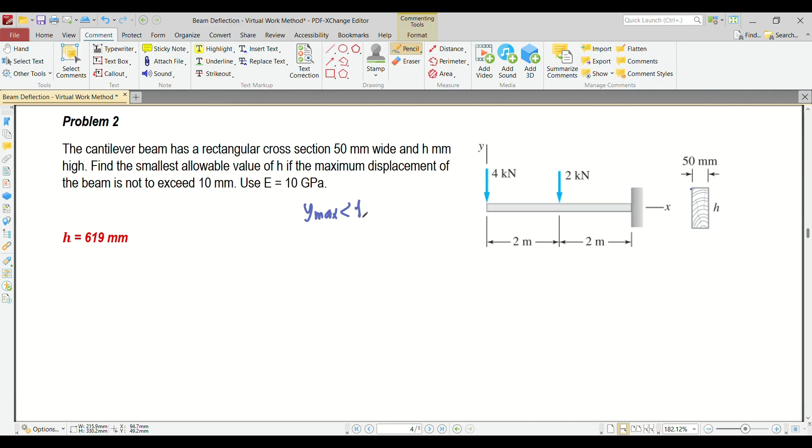So in this problem, meron ka lang na limitation na dapat daw yung Ymax mo should be less than 10 millimeters, tapos hinahanap yung value ng h. So now, how do we solve this problem? Just like what we did on our previous example, you need to cut the real beam and then get the moment equation. So cut natin to. Since may dalawang segment kasi naputol yung loading, so dalawang moment equation din.

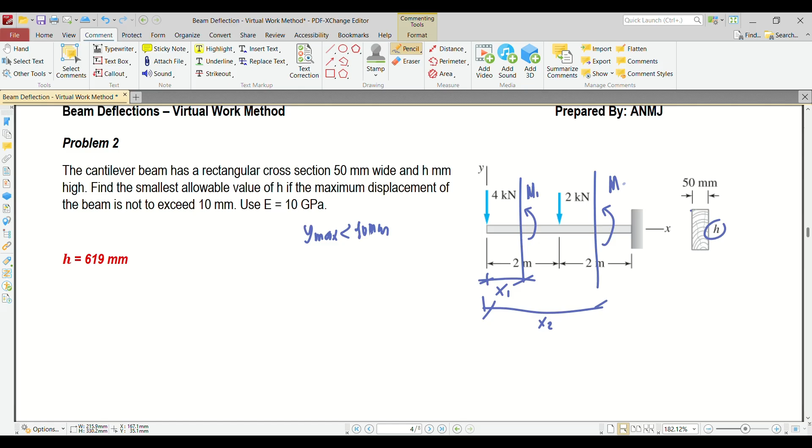So this is x sub 1, this is big M1. Big M1 or big M in general is used if you are creating moment equation for the real beam. So now, let's create moment equation. So yung M1 natin class is just equivalent to negative 4 x sub 1. Negative siya because it has the same direction for the moment.

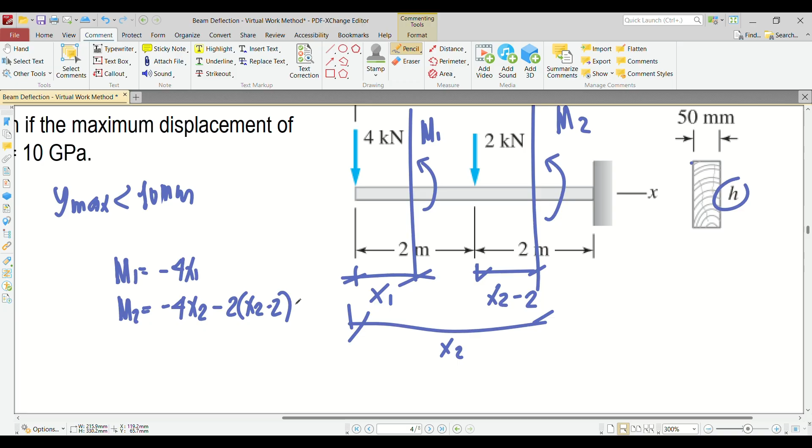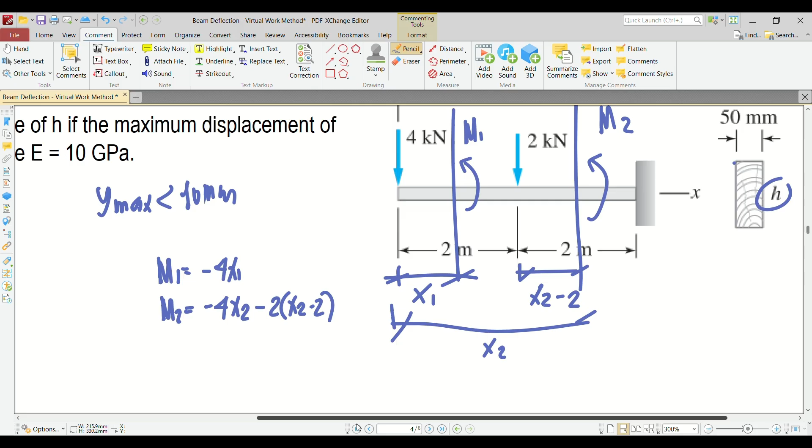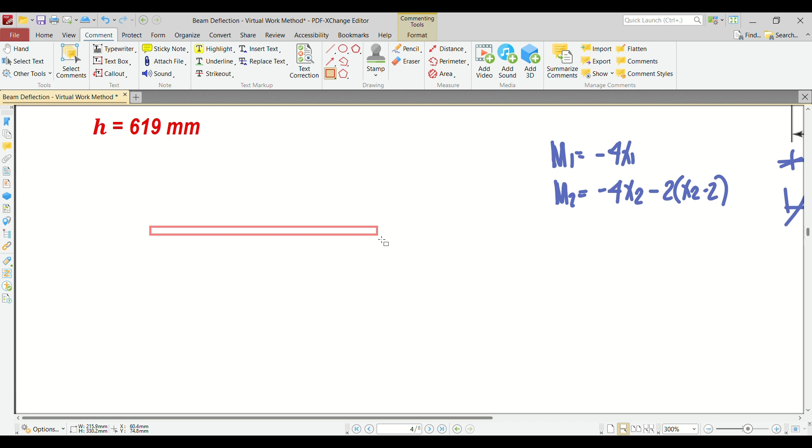So ang pinapahanap maximum deflection, so kailangan natin mag-create ng virtual beam. Again, yung support condition hindi nagbabago. You just need to incorporate 1 unit virtual loading. So this is our beam. 2 meters pa din ito, and then this one is 2 meters. You need to incorporate 1 unit loading downward. Siyempre downward naman talaga yung deflection dyan. Kung paano mo kinat yung real beam, ganun din yung virtual beam. So this is small m1. This is small m2.

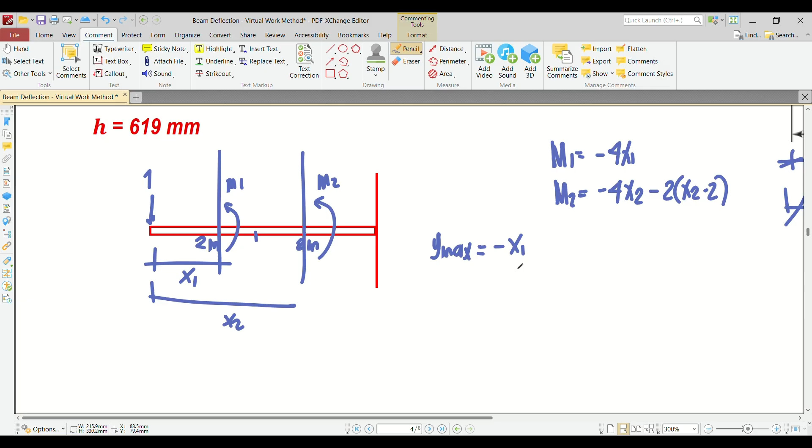So now, hanapin natin yung Ymax. Moment equation muna. So m1 is equivalent to negative x sub 1, and then m2, negative x sub 2. And then let's plug that in our formula. So our formula is 1 multiplied by Ymax is equivalent to 1 over EI multiplied by the integral of negative x sub 1 multiplied by negative 4 x sub 1 dx1 from 0 to 2.

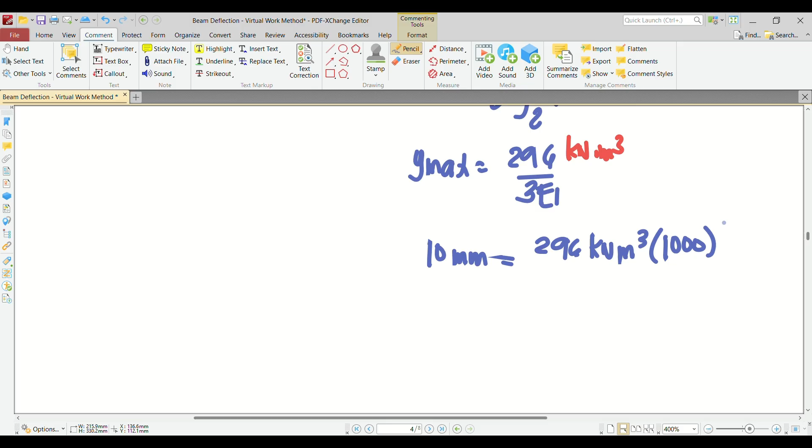Yung E natin is 10 GPa. So pag kinonvert mo yan, that's 10,000 MPa. So 10,000 Newton. Cancel ko na to ha, para hindi tayo malito. Newton over millimeter squared multiplied by B. Ano ba yung B natin? So yung B natin class is 50.

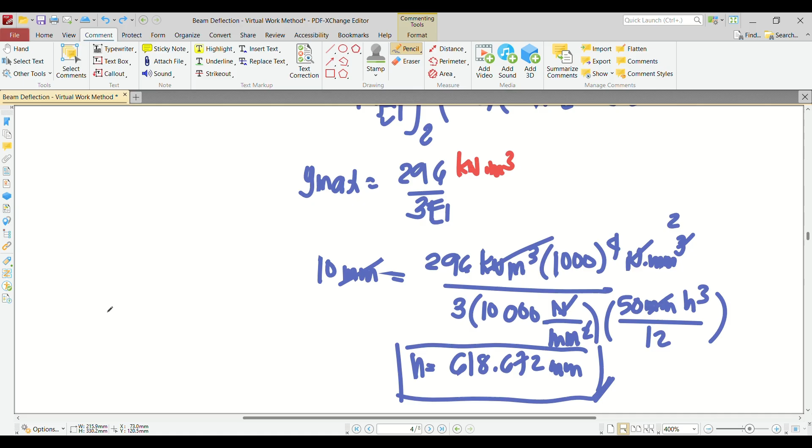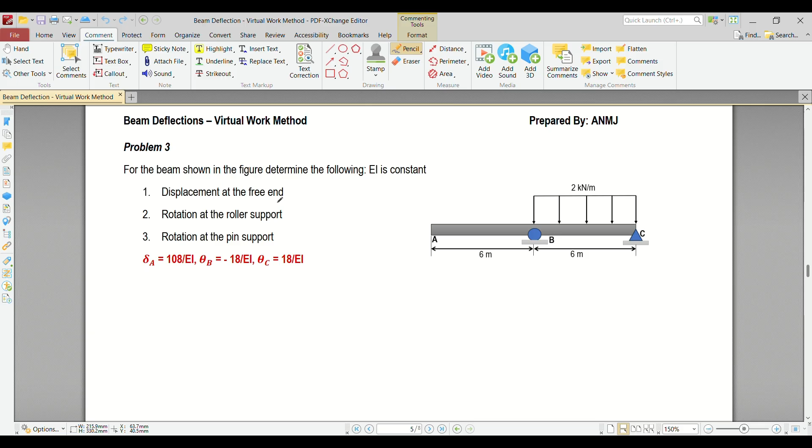So, the right answer here is 618.672 or 619. Okay? So, that's how we answer problem number 2. Okay, so let's start to answer problem number 3. So sabi dito class, for the beam shown in the figure, determine the following. EI is constant. So pinapahanap sa atin, displacement at the free end, rotation at the roller support, and then rotation

at the pin support. So ngayon class, madali lang naman solvein yung reaction nito. So para lang siyang simply supported beam and then subjected to loading. Although it does have a free end, wala namang kasing loading doon. So we don't need to use that segment in determining the value of the reaction. So parang WL over 2 lang ito. Parang uniform load na simply supported.

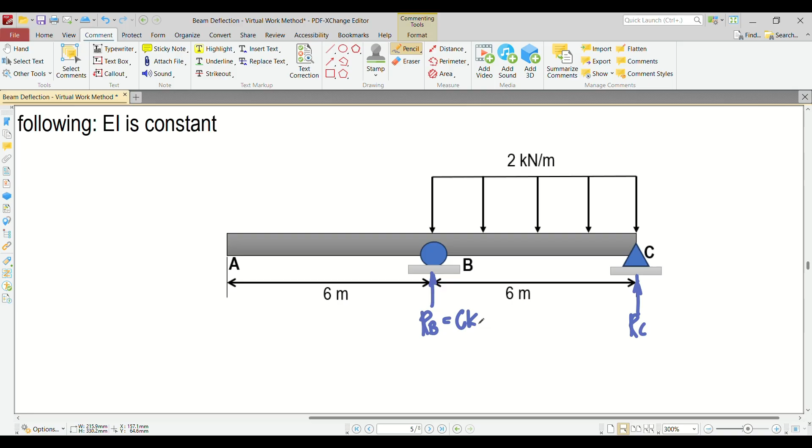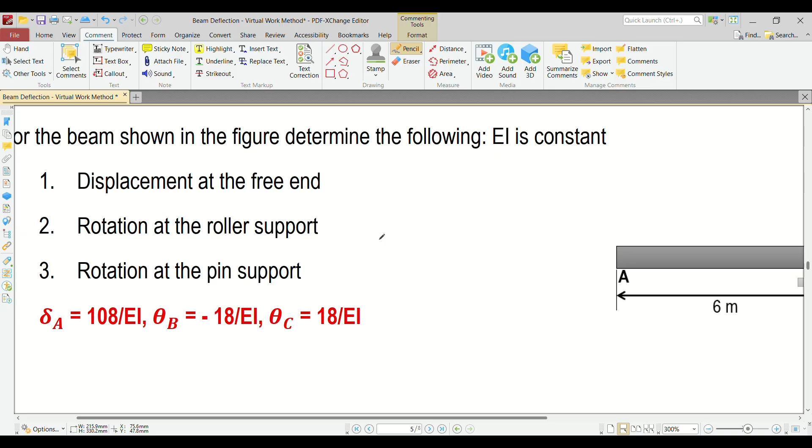So ngayon class, ang sabi kasi for number 1, we need to find the displacement at the free end. So ibig sabihin, kailangan natin magkaroon ng isang cut dito. Kailangan natin isama siya sa calculation natin. Kasi we need to incorporate 1 unit load there. Okay? So paano yan? So unang cut natin siguro dito.

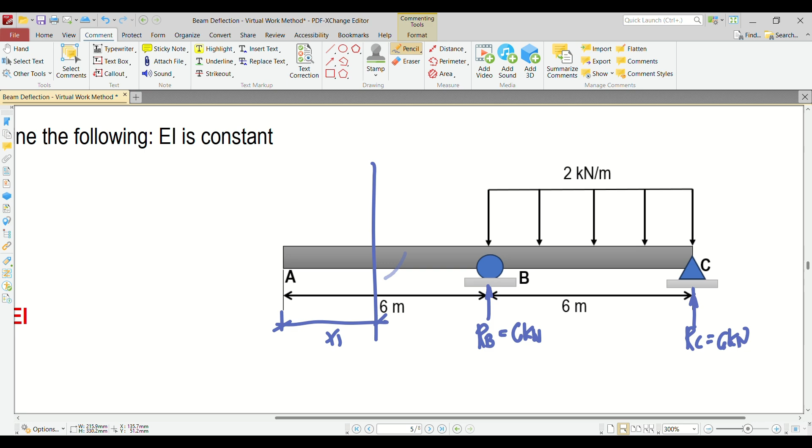So this is x sub 1, and then counterclockwise moment, this is big M1. And then, pangalawang cut dito siguro. This is x sub 2, and then this one is M2.

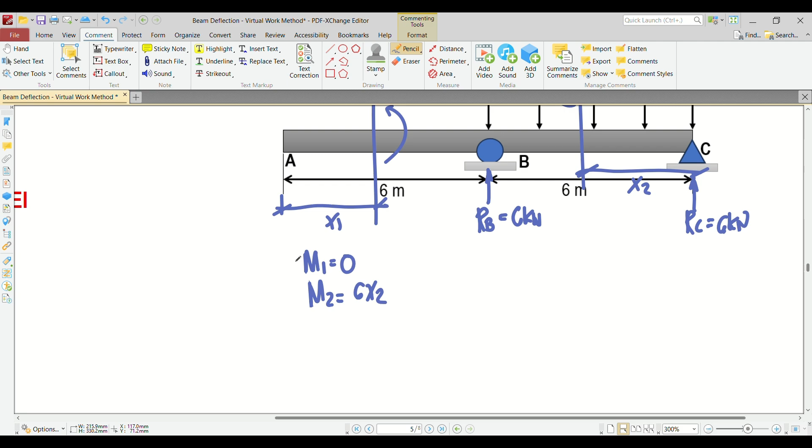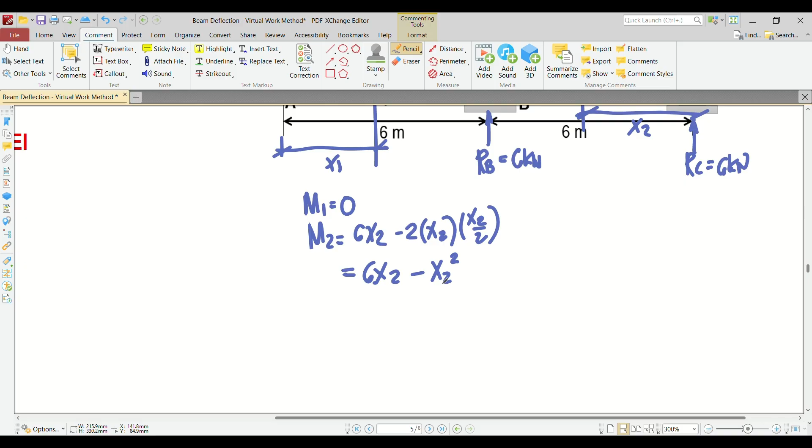So yung M1, madali lang, wala naman kasing loading, so therefore that is 0. So yung M2, opposite direction positive, same direction negative, opposite direction yung reaction, no? So we have 6 x sub 2, and don't forget you have uniform loading. So yung uniform loading natin, same direction, so that would be negative for force, distance, x sub 2, and then centroid, x sub 2 over 2. So therefore, ang answer here is, lagay ko na sa baba, this is 6x2 minus x2 squared. So we have now the value for big M1 tsaka big M2.

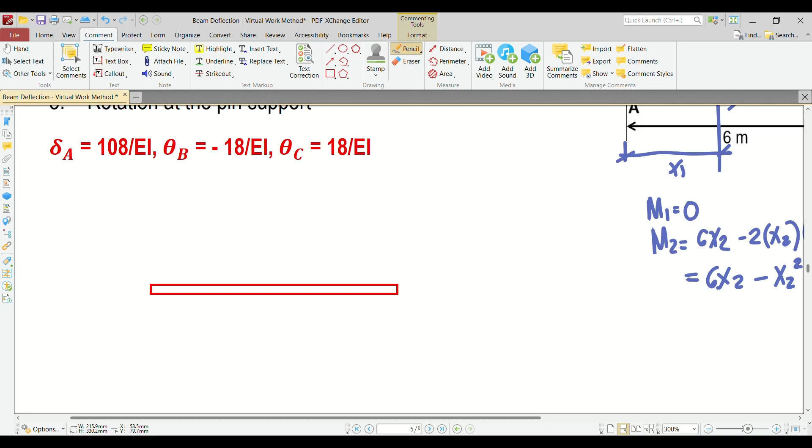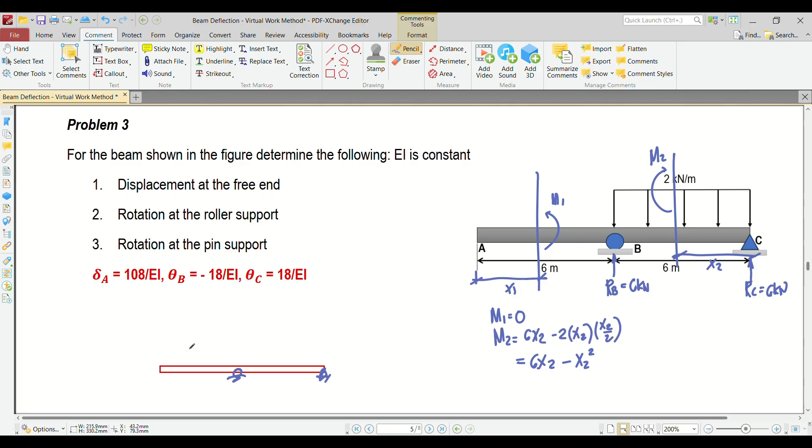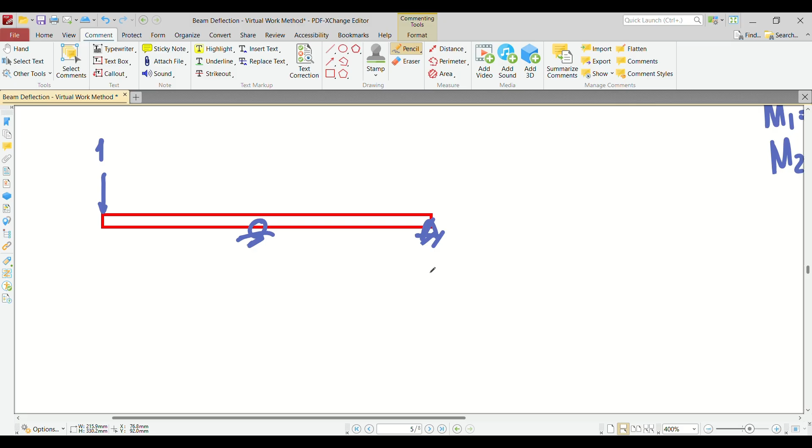So let's solve for the equation for virtual beam or yung small m. Ganun pa din, roller pa din ito, tas pin. Roller and then pin, and then determine the displacement. Ibig sabihin, kailangan natin mag-incorporate, assuming na 1 unit load yung i-apply natin dito, downward. So ngayon, kailangan natin computein yung reaction. So this is A prime, this will be B prime, and then this is C prime. This is 6 meters. This is also 6 meters.

So now, how do we solve this one? We need to solve for the reaction first. Kung meron kang 1 dyan, pag nag-moment ka sa B prime, dapat, if this is moving counterclockwise, dapat yung C prime mo is downward, dapat clockwise siya, yung RC prime. Pag nag-moment ka dyan, summation moment sa B prime equals 0, clockwise positive. So therefore, negative 1 multiplied by 6 plus RC prime multiplied by 6, equal natin sa 0. So yung RC prime natin is just equal to 1. Kung 1 yan, dalawang pababa, yung RB prime mo must be in upward direction, kasi dalawang pababa na yan eh. That is equal to 2 kilonewton.

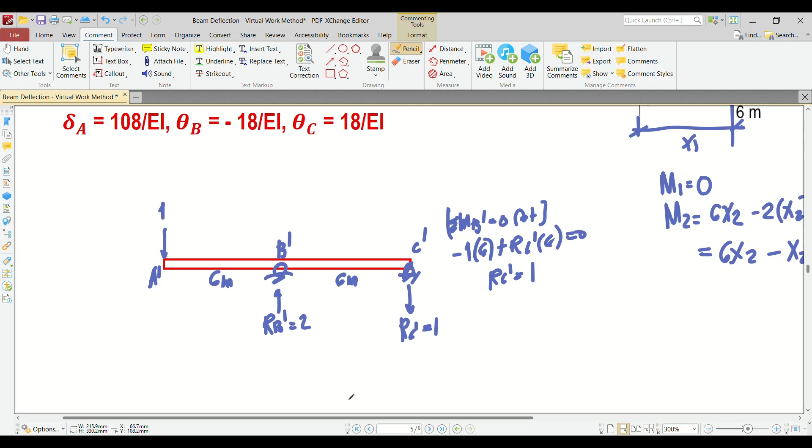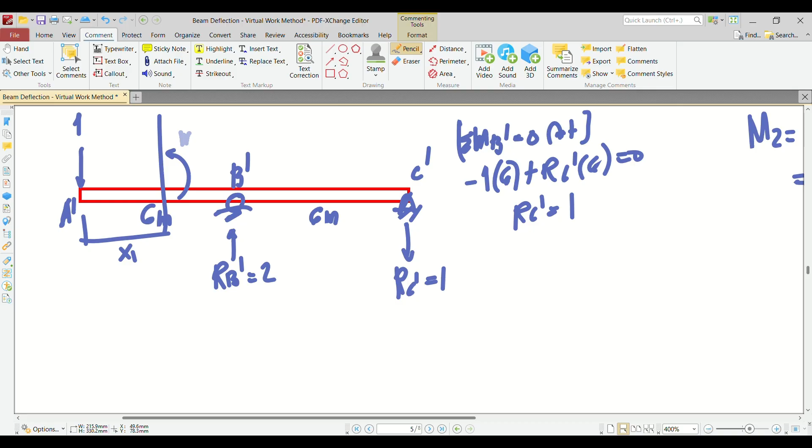So ngayon, after that, kung paano mo kinat yung real beam mo, ganun mo din ikakat yung virtual beam. Cut natin. This is x sub 1, small m1, cut, x sub 2, small m2. So, small m1, dito ko na nalagay, is equivalent to opposite direction positive, same direction negative. So same direction yan, negative x sub 1 lang. And then m2 natin, same direction din, so negative x sub 2 lang. Hopefully naiintindihan yan, no? So, same direction kasi, so we can now plug in that in our formula.

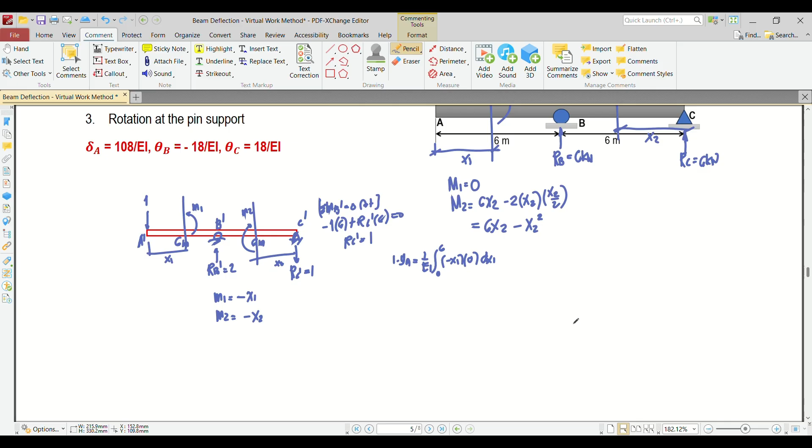So ano yung formula natin? 1 multiplied by YA is equivalent to 1 over EI multiplied by the integral of small m1, negative x sub 1, big M1, 0, dx1, from 0 to 6. Paano naging 0 to 6? You need to scan all of the segments of the beam. Dito tayo nag-start, nagpalit ng loading dito, so yan yung i-scanin natin, 0 to 6. Ganun din sa kabila, from 0 to 6 lang din, para magtagpo sila. So plus

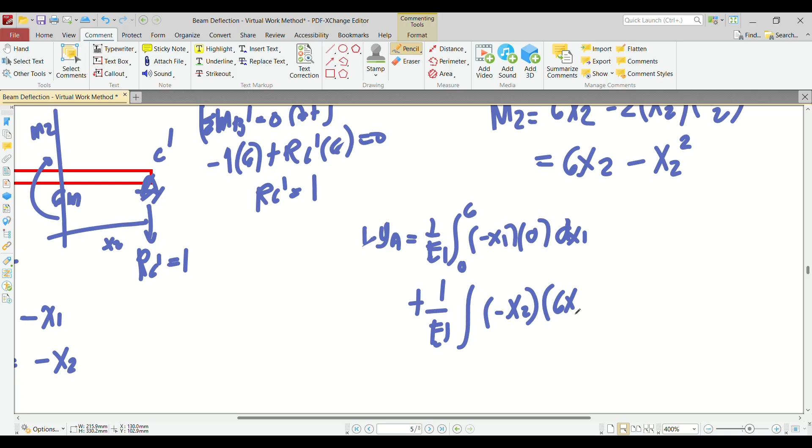1 over EI multiplied by the integral of, this is negative x sub 2 if you'll remember, no? Ayan po, negative x sub 2, and then this one is negative, positive 6x2 minus x2 squared dx2 from 0 to 6. Okay, so let me calculate first the value for YA.

Ilan kaya to? Pwede mo na i-cancel to kasi 0 naman, no? Negative x, 6x, from 0 to 6. So yung nakukuha ko, class, is negative 108 over EI. Tingnan natin, so ang sagot is 108 over EI.

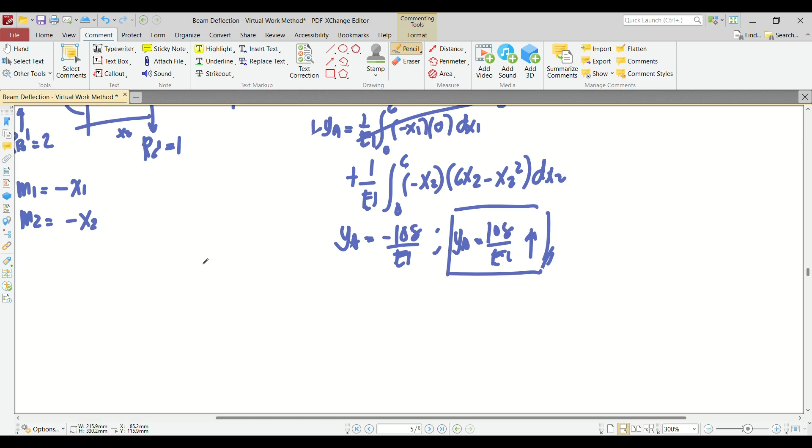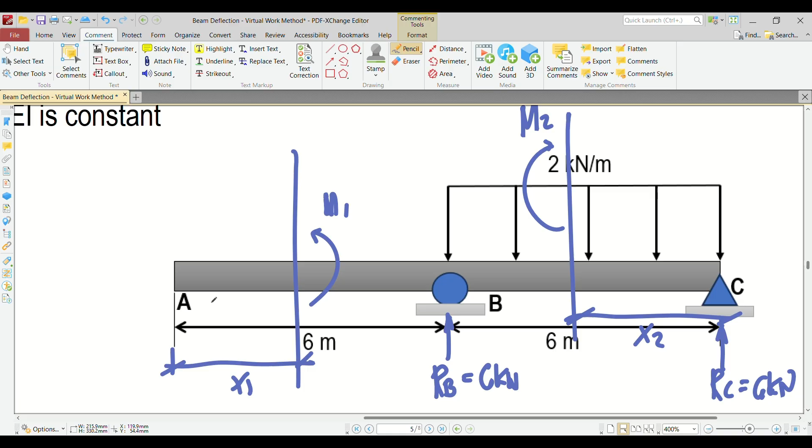So ba't negative? It means that your deflection is upward. So yung tamang sagot dyan, class, is yung YA mo is 108 over EI upward. Bakit upward? Kasi nga inassume natin na yung 1 unit loading natin is downward. Kapag nag-negative yung sagot, ibig sabihin, upward yung deflection. Force multiplied by the displacement, the displacement is along the direction of the force. So ngayon, aasahan mo naman talaga na negative yung value sa A or yung deflection sa A, kasi nga pag diniinan mo to, aangat tong part na to, di ba? Pag ganun, parang yung elastic curve dyan, ganito itsura.

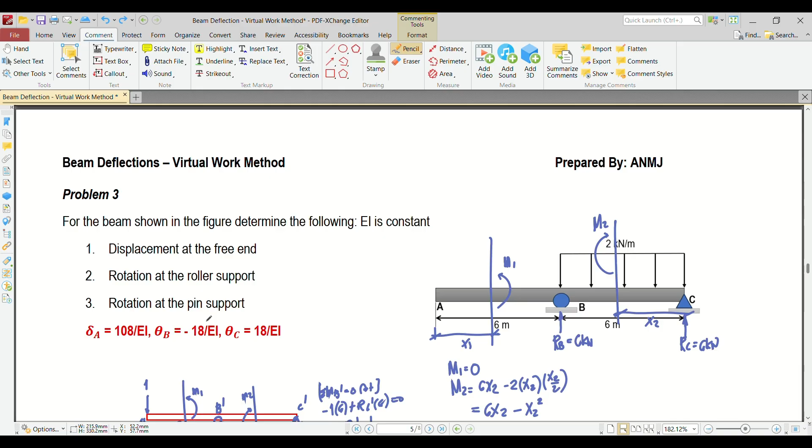Okay, so ayun. So now let's try to solve number 2 for problem number 3, yung rotation at the roller support. Roller support yung nasa gitna. Okay, so dito natin gawin.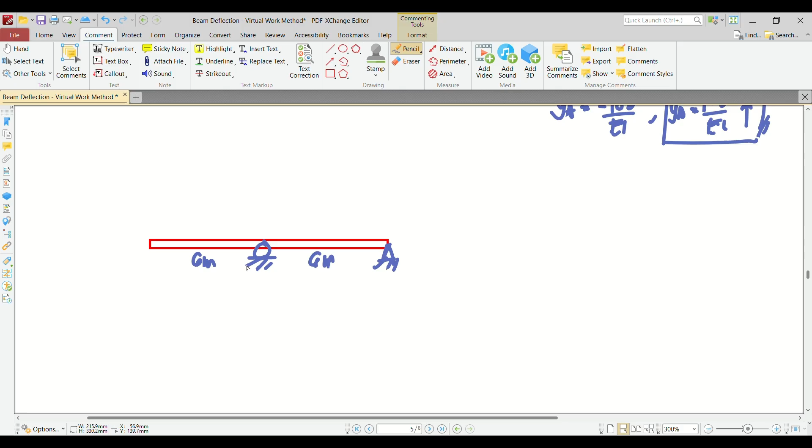Ito yung roller support. This is 6 meters, 6 meters. Okay? This is A prime, B prime, and then C prime.

Ngayon, class, assume natin na yung rotation dito is clockwise. Yan yung 1 unit load natin. We need to counteract that movement in terms of a couple on the reaction. So kung ito ay clockwise, dapat yung reaction natin counterclockwise na couple. So ito dapat pababa, ito dapat pataas.

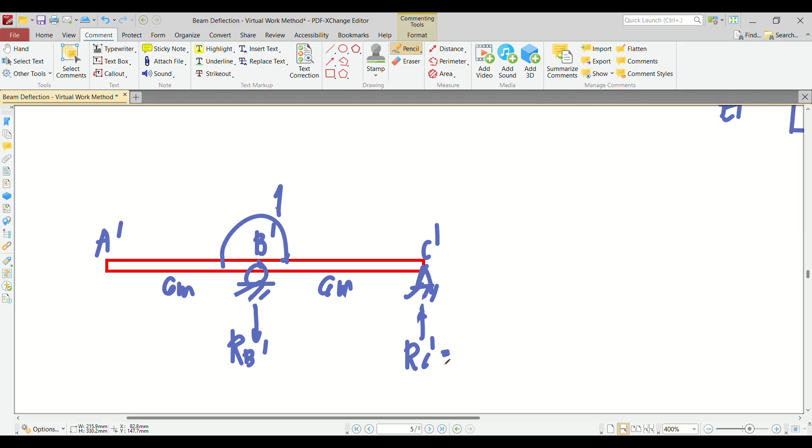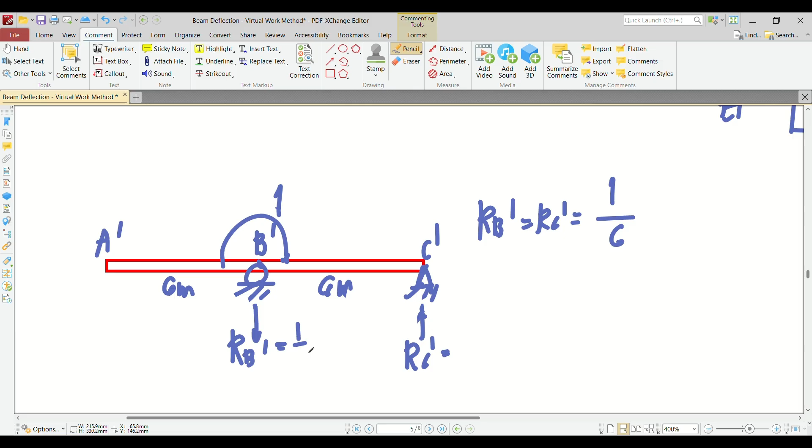Ang sabi natin kanina, to determine the value of RB prime and RC prime, that is just equivalent to the moment, which is 1, divided by the total distance between the supports. So in our case, that is 6. So you need to divide this by 6. So therefore, ang reaction pala dito ay 1 over 6. Ito rin ay 1 over 6.

Okay, let's create the moment equation. Kung paano mo kinuha yung real beam, ganun mo din ikukuha ito. X sub 1, small m1. X sub 2, small m2. Yung small m1 natin class, 0, wala naman kasing loading. Yung small m2 natin, it does have a value that is 1 over 6 x sub 2.

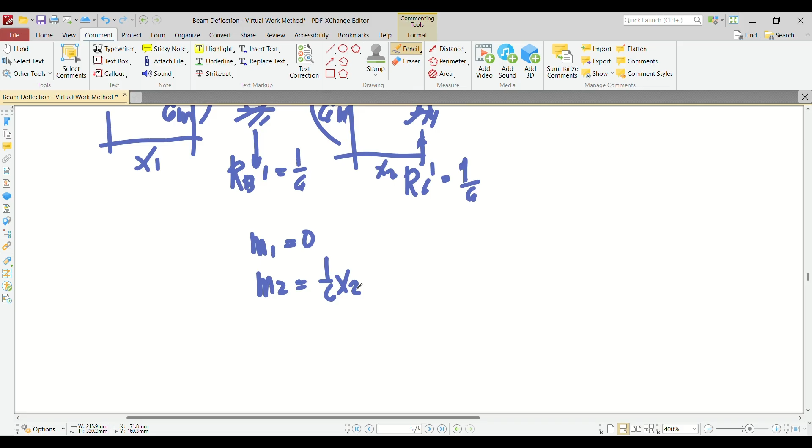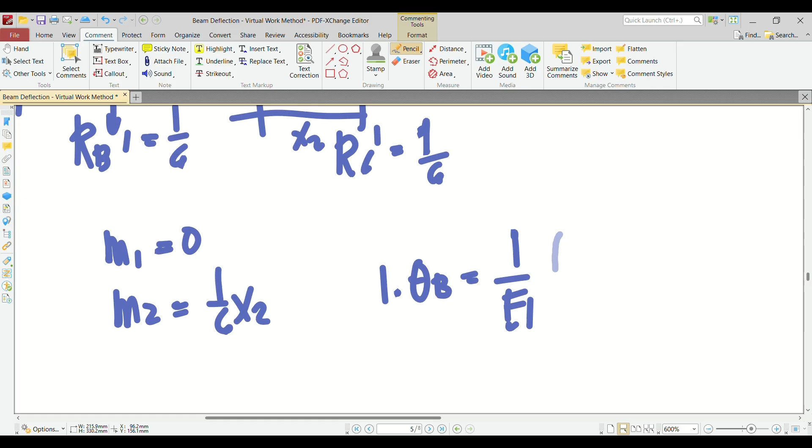I-plug in na natin yan sa ating formula. Yung value ng m2 natin ay 6x2 minus x2 squared. Tandaan natin yan. So 1 multiplied by theta b is equivalent to 1 over EI multiplied by the integral of 1 over 6 x sub 2, which is 6 x sub 2 minus x sub 2 squared, dx2 from 0 to 6.

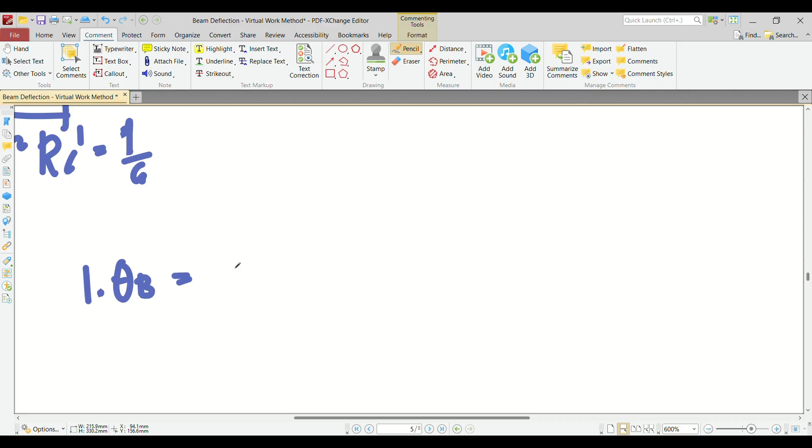Baka malito kayo, sige na nga, sulat ko na nga yung una. Yung una natin class is 1 over EI. 0 lang kasi kaya hindi ko sinulat. So 0 dx1, from 0 to 6, ito po yan. 0 kasi ito, 0 din ito. Okay, sinulat ko na lang.

Plus 1 over EI multiplied by the integral of, again, this is 1 over 6 x sub 2, which is 6 x sub 2 minus x sub 2 squared, dx2 from 0 to 6. Let's see if we're correct. Tama naman. Wag mo nang i-calculate to, 0 na yan. So what's the value for theta b?

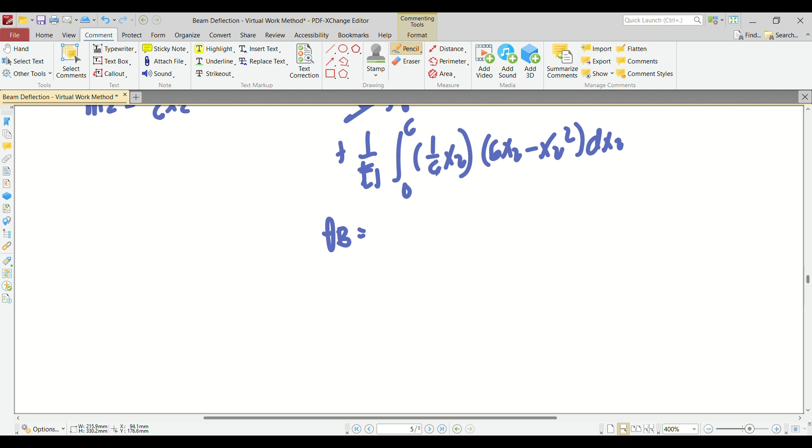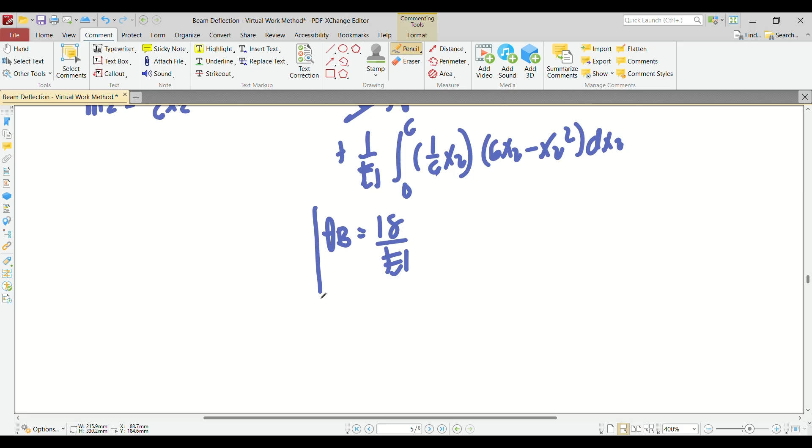Ang lumalabas sa akin, 18 over EI. Positive, so it means that the direction of my theta at point B is really in clockwise direction. Tama ito. Okay, and then lastly, we need to find the rotation of the pin support. So gawa ko ulit virtual beam.

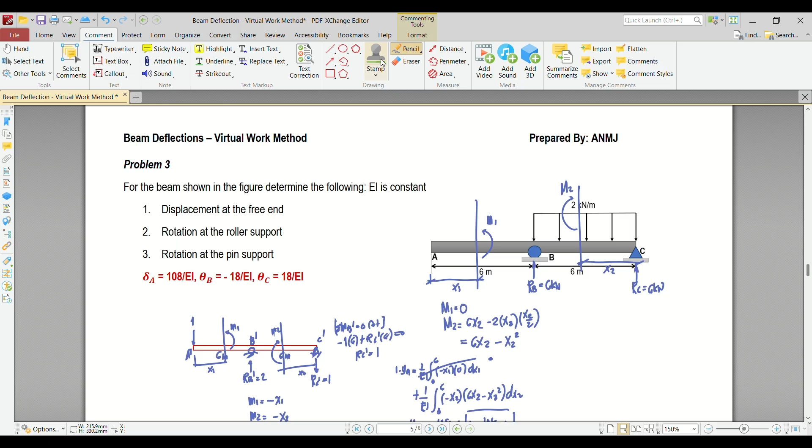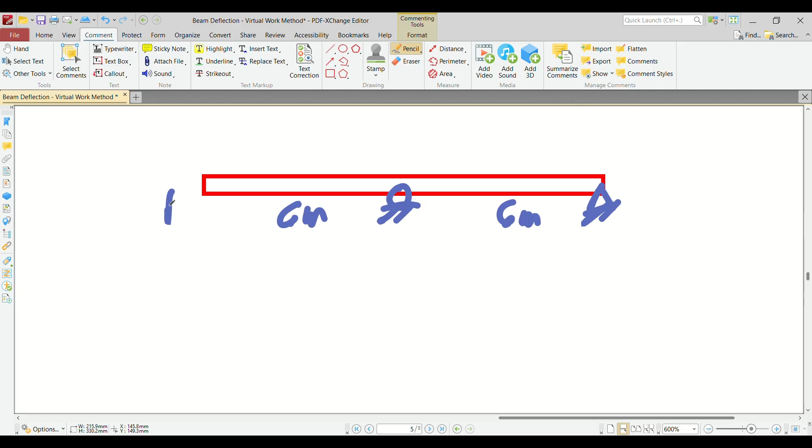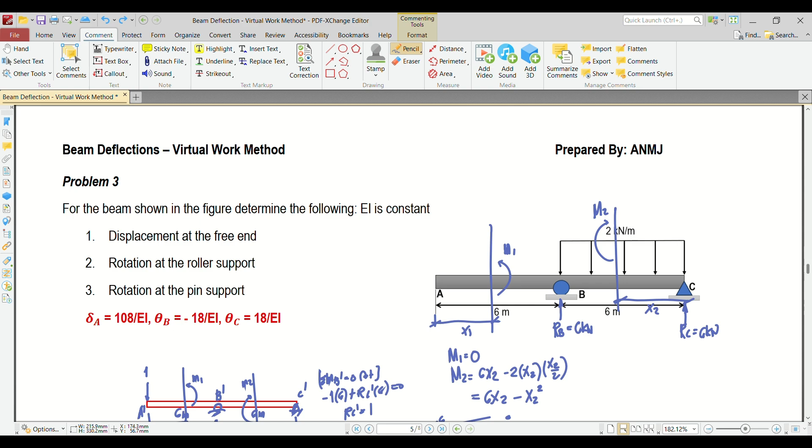This is 6 meters, 6 meters, and then A prime, B prime, and then C prime. Assume natin na counterclockwise naman sa point C, kasi ginaga-assume ko nga na ganito yung rotation niya, ganito yung direction niya, yung elastic curve. Kapag gumawa ng tangent line dyan, ayan, counterclockwise. So assume natin na counterclockwise yung moment dito.

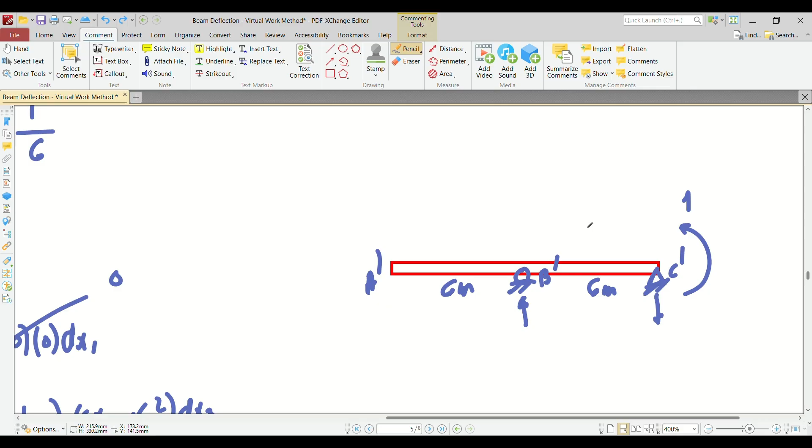So that's 1. Again, to resist that movement, yung B prime mo dapat upward, yung C prime mo dapat downward to form a clockwise rotation for the support. So this is RB prime, this is RC prime. Parehas lang naman yan, moment divided by the support distance. So that's 1 over 6 parehas, but opposite in direction.

Ang gawin natin, i-write tayo ng moment equation. Ito, x sub 1, small m1, x sub 2, small m2. Remember, this is downward, yung RC prime. Okay, so let's compute. Paano to? So m1 is equivalent to 0, and yung m2 natin is equivalent to 1, opposite in direction, minus, same direction yung RC prime, so 1 over 6, x sub 2.

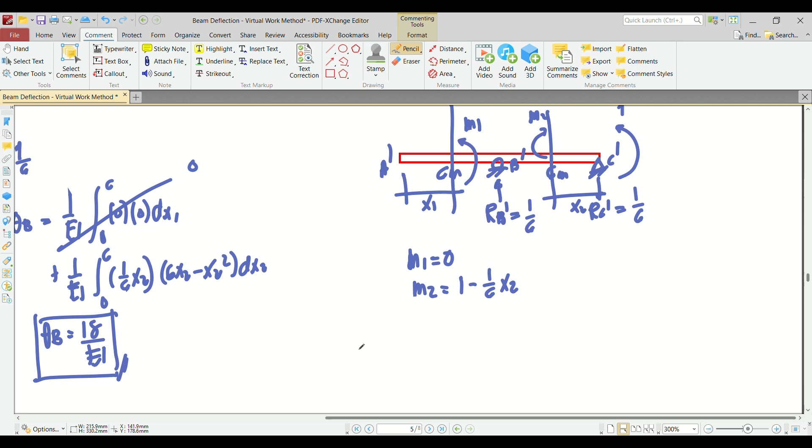We cannot plug in that in our formula. So paano? So 1 multiplied by theta c is equivalent to 1 over EI multiplied by the integral of 0 dx1 from 0 to 6. And then plus 1 over EI multiplied by the integral of small m2, that is 1 minus 1 over 6, x sub 2, this is 6.

Ito akin, nakopya ko lang. Yan yung m2 natin, Big M2, x2 squared dx2, from 0 to 6. Okay, so let's figure out what's the value for theta c.

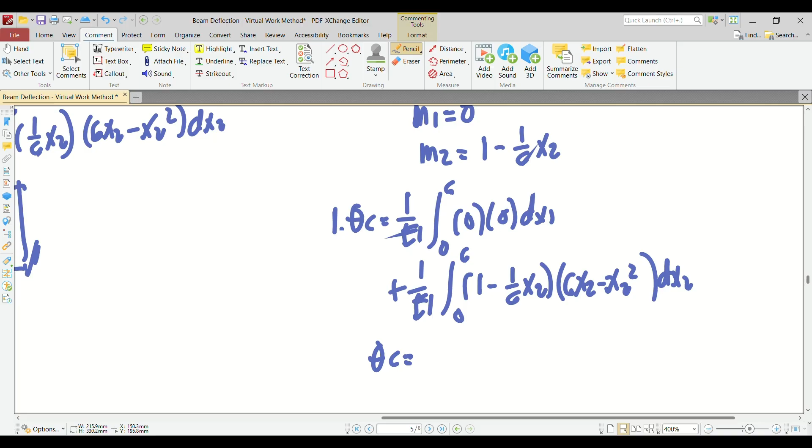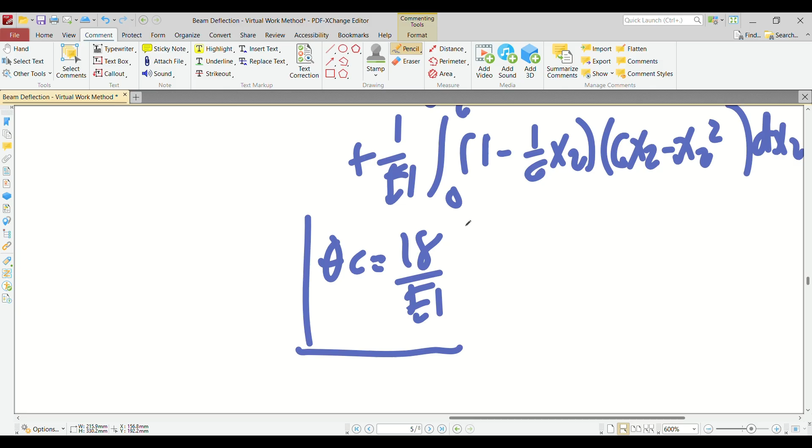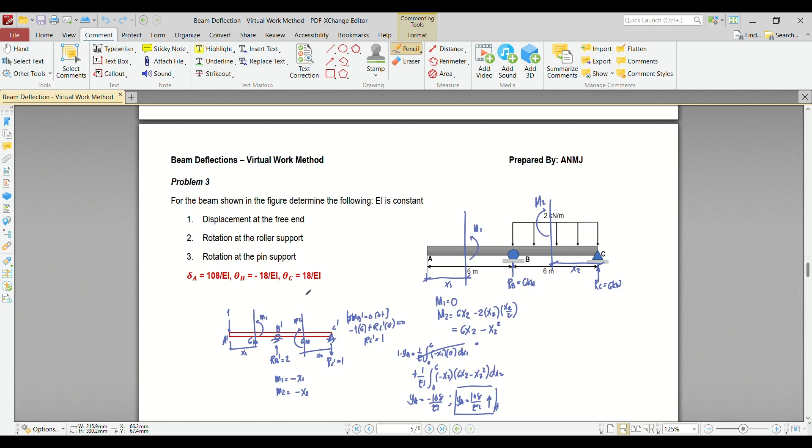Ang lumalabas pa din sa akin for theta c is 18 over EI. So it means that our direction for the slope is correct kasi positive yung lumabas. Okay, so therefore, this is our answer. Kung titingnan niyo yung answer present dito sa aking module, parehas naman yan. Okay, so that's how we answer problem number 3.